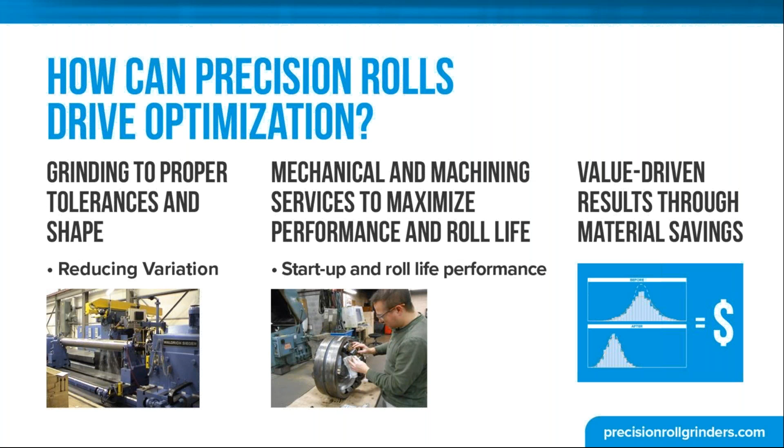So driving operational excellence. Again, it comes down to variation, right? Eliminating barring or machine direction variation. Sometimes people call it corrugations, barring, whatever the terminology that you want to use. But without optimum roll roundness and concentricity, that machine direction variation, although it may not be obvious on your machine, is causing issues downstream and how that product is formed. How you have to dry that product, and so on and so forth.

So we talk about roll roundness and we talk about concentricity. Not only does the face of that roll need to be round, but it needs to be concentric to the journal so that you're not putting, in essence, a cam in your coater. It's also the shape of the roll. It's reducing variation in the cross direction or reducing profile variation. That needs to be accomplished through proper roll shape. Again, these are all grinding and servicing issues that we would encourage you to take a really close look at.

And what's the end result? The end result should be material savings in one manner or form, right? If you're able to reduce a streak on the profile of your coating or your lamination process, if you're able to reduce machine direction variation as you're producing that, then you're able to operate your equipment and your coater in a range where you're putting the minimum amount of product on that you need to meet not only your quality goals, but your production goals.

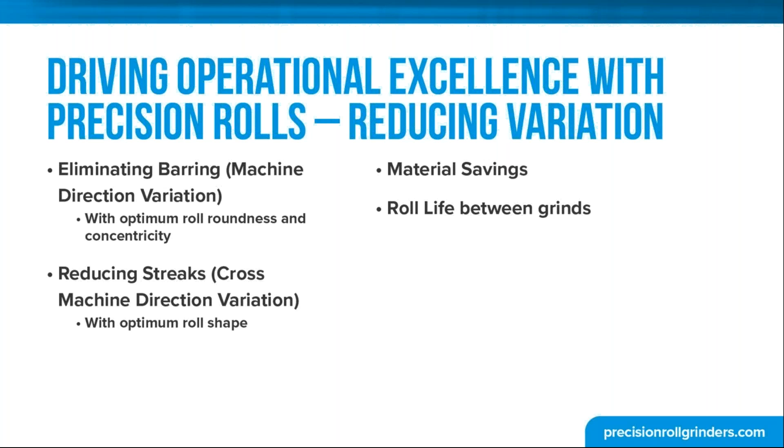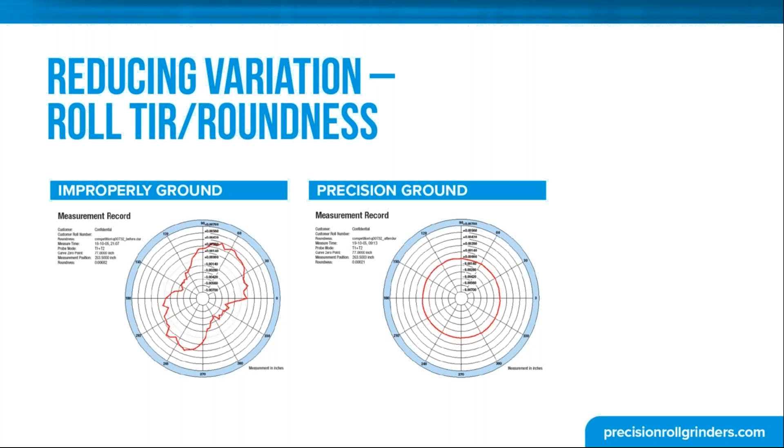Why does the graph on the left-hand side happen? Well, we'd ask you to keep some things in mind. First, grinding in bearings. If I go back one slide, the infographic on the right-hand side is almost impossible to achieve if you're grinding in bearings. And why is that? Well, the roll moves when it's ground. There's play in the bearings by design. It also moves in and out with defects.

The roundness that we're speaking of in the original manufacturer specification is not possible in most cases when you grind in bearings. The true concentricity certainly is not possible because you're not grinding the face of that roll in reference to the journal. And then the shape is not attainable as well. So not only is it affecting the roundness and the machine direction variation as you go around the circumference of that roll, it's in turn affecting the shape of that roll too. So when it comes to cross direction variation, when it comes to profile variation, it's also critical that the roll not be ground in bearings.

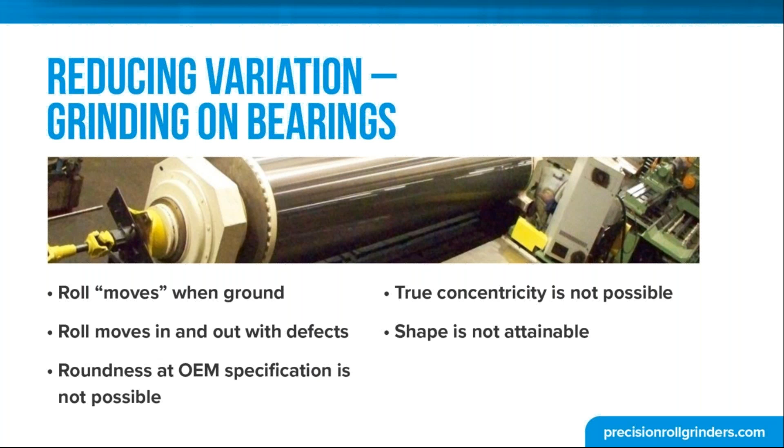There's limits to other types of grinding too. We picked block grinding here. It may or may not apply to what you're doing, but it does apply in many industries. And again, this is a general overview for coating and laminating, but for any other potential industry as well. Machine direction material variation can't be optimized when you're grinding in-house or you're block grinding. The cross direction variation also cannot be, and it's just not uniform.

Unfortunately, when you grind in place, in many cases you're compounding the issues that are already there in your roll. So if there's a skew in the roll, if there's a profile issue in the roll, or if there's machine direction variation, the way that in-house or in-place grinding happens, you're generally following that and you're compounding it.

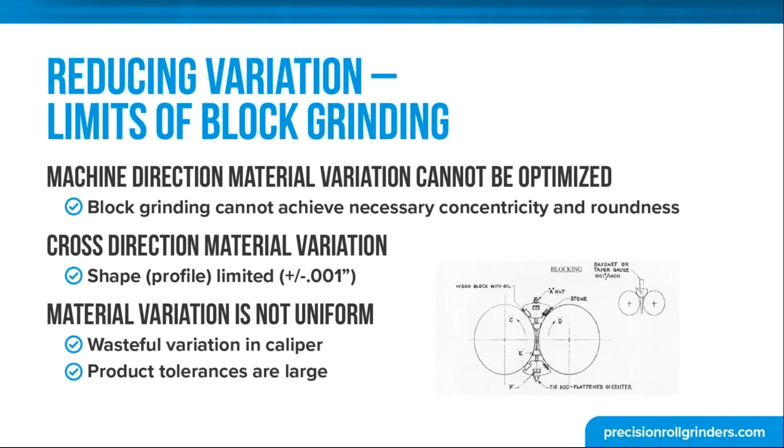So there are a number of applications we know within the coating world that take this kind of tolerance. You have to make sure that you're working with a partner on your roll grinding and services that can achieve those tolerances. And 10% of our work has tolerance of less than 2.5 microns or less than 1/10. Our typical work is 2/10 or 2/10,000ths of an inch. So we're very, very comfortable down in those ranges where certain specialty coating applications have to take place. And again, it goes back to reducing that variation, which leads to material savings and leads to more optimal running.

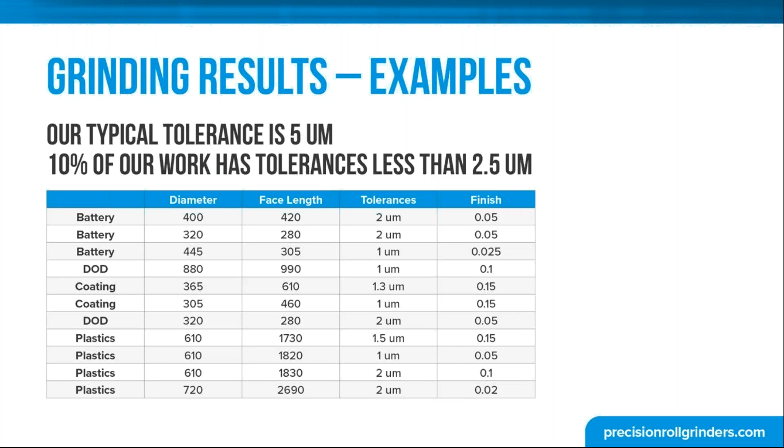So let's talk a little bit about material savings. Reducing variation in material thickness. And we say material because if you say coating, there's a number of coating applications out there. There's a myriad of processes, whether it be a machine coater on a paper machine, or a coater making specialty medical products, or somebody laminating a substrate or laminating something to a substrate. It all comes down to the same principles.

And that's first is to reduce the material usage, reduce the coating, reduce the laminate, reduce the starch compound perhaps in a coating type application that you're putting onto the sheet due to thick or wavy profiles. If you're going through your unit operation with machine direction variation and cross direction variation, you're not applying an even amount of product. What we've found time and time again with our partners in the industry is that you have to add more product than might be necessary to make up those differences, to fill in the valleys and the voids, if you will.

Reduce defects due to localized thinning in the material profile. We've seen that on a number of occasions as well, that the application of the coating itself produces thin areas because the roll profiles aren't properly ground, and that causes defects.

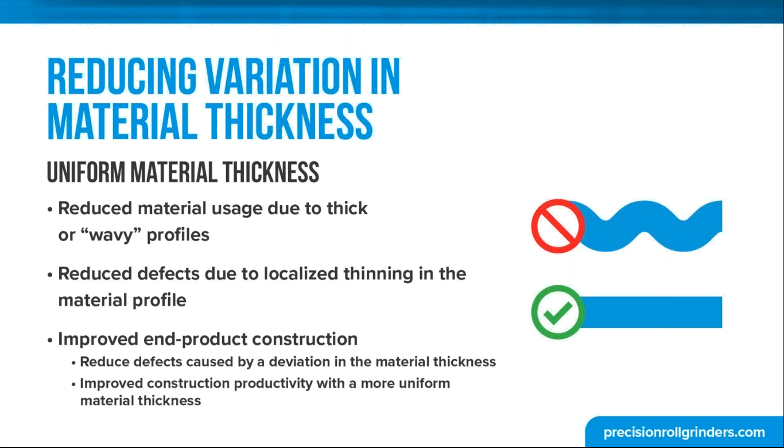These are precision unit operations. Coaters are very precise pieces of equipment. Laminators are very precise pieces of equipment, and you need precision rolls to match that. So let's talk about roll shape a little bit.

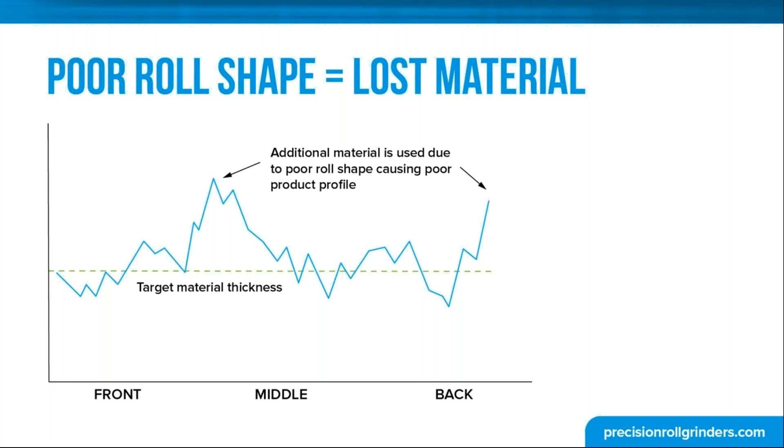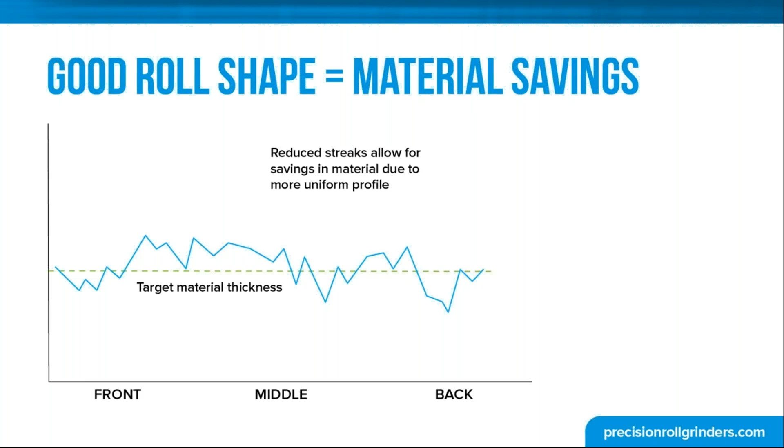You ought to be also working with a supplier for your roll grinding and servicing that works through the economics with you. This is an example, obviously nobody's numbers in particular. We're certainly cognizant and sensitive to the non-disclosure agreements that we have out there and would never share that. But these are just numbers that are plugged in as an example to look at all the different variables that go into total cost of operation around your rolls.

All too often we think of roll services as just a line item maintenance cost. It's really an investment. It's an investment in your production. It's an investment in your machinery. It's an investment in your time going forward to produce the best product in the most consistent manner possible.

So we look at the initial grind cost. Precision Roll Grinders could be a lot higher than a competitor. However, how much roll life are we getting out of that versus that other grind? And what are the savings associated with that? What are the production hours that may be lost because of breaks around a coater or a laminator due to poor roll shape, around issues of off quality, which is the scrap while running improperly ground rolls, production speeds.

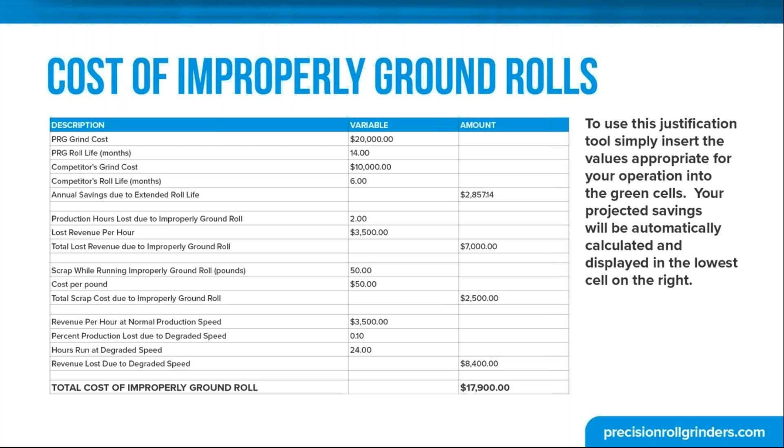If you're having to run more material through a coater or a laminator or some type of unit operation, then that's got to be conditioned downstream. It's got to be dried. It's got to reach a final set of specifications for moisture content, for strength, and for those kinds of things. So again, you got to look at the whole picture holistically to get a really good idea. And at the end of the day, your investment in that roll service needs to prove itself.

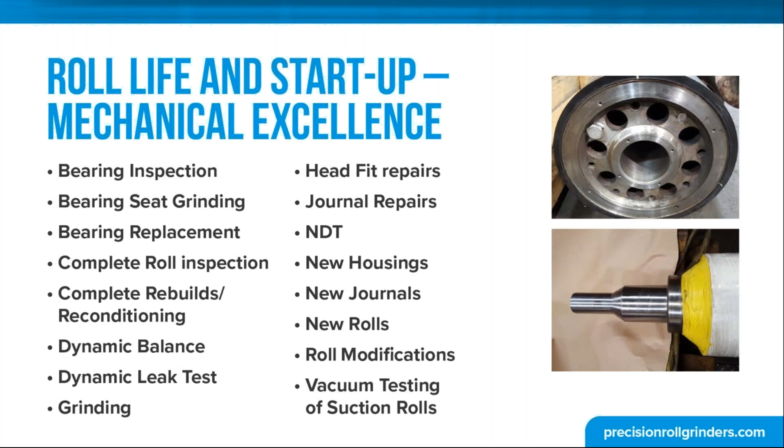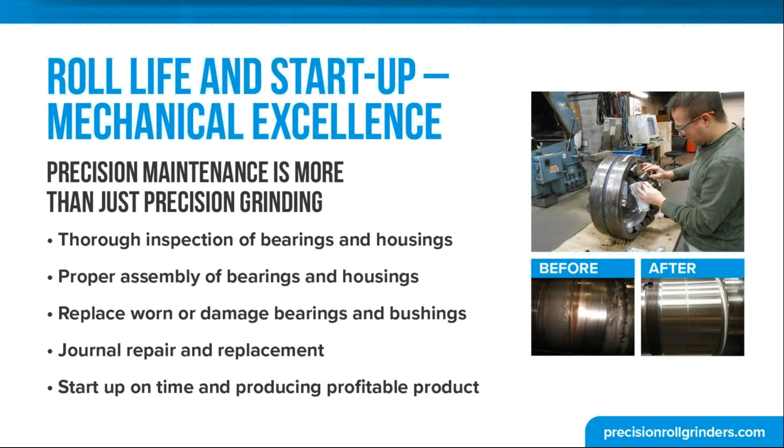So thorough inspection, proper assembly, replacing worn and damaged bearings and bushings and other components, the journal repairs that we talked about, that all contributes to starting up on time and producing profitable product quickly and then consistently for the life of that roll.

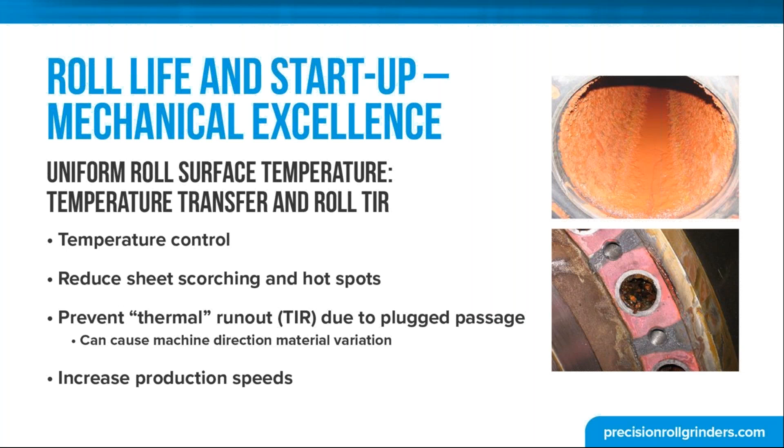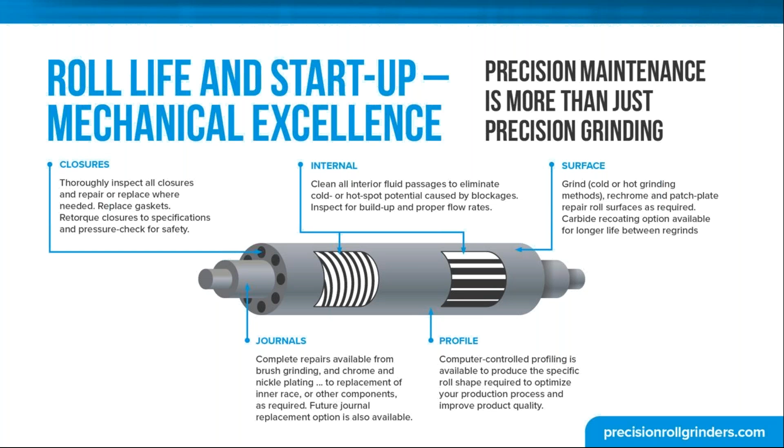The profile of the roll, the shape that we've been talking about, the surface finish itself. Is there a certain RA finish that you need? In many cases in coating and laminating, that's the case. So it's all encompassing mechanical excellence and grinding excellence to provide the roll that you need for your process. So let's talk about that.

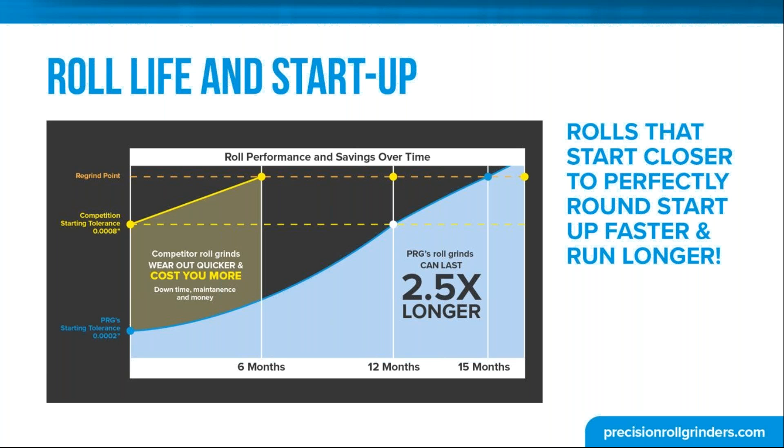We've seen this repeated. It takes a year just to get to the starting tolerance that you start perhaps with a competitor grind. And then in 6 months, that roll that started at 8 10,000ths or 1,000th is at a point where it needs to be reground due to quality issues. Whereas the roll that started at 2 10,000ths is way beyond that in life. So we're encouraging you to keep that in mind as part of the entire package around roll servicing and particularly roll grinding.

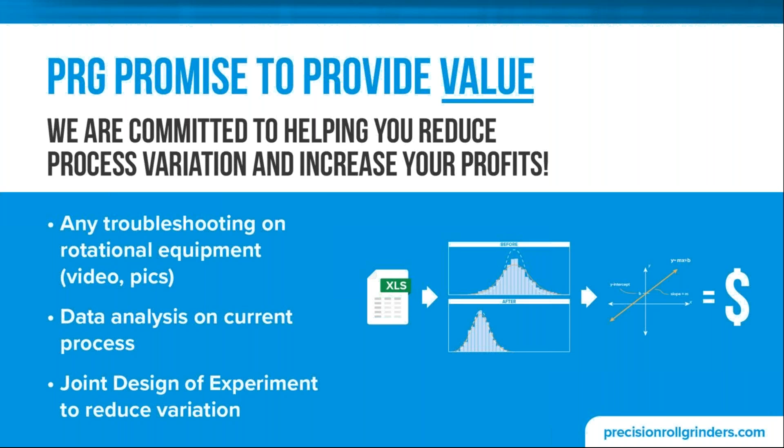We can do that through your data or through samples that you can send us. We'd be happy to talk to you about that. But at the end of the day, we're committed to providing that value, real concrete economic value. And we again encourage you to ensure that you're getting that from your roll grinding providers.

So this is a commitment to true economic, statistically validated data that Precision Roll Grinders is committed to, and we would again ask you to think about that when considering who's grinding your rolls for your coaters and laminators and any other unit operations you may have.